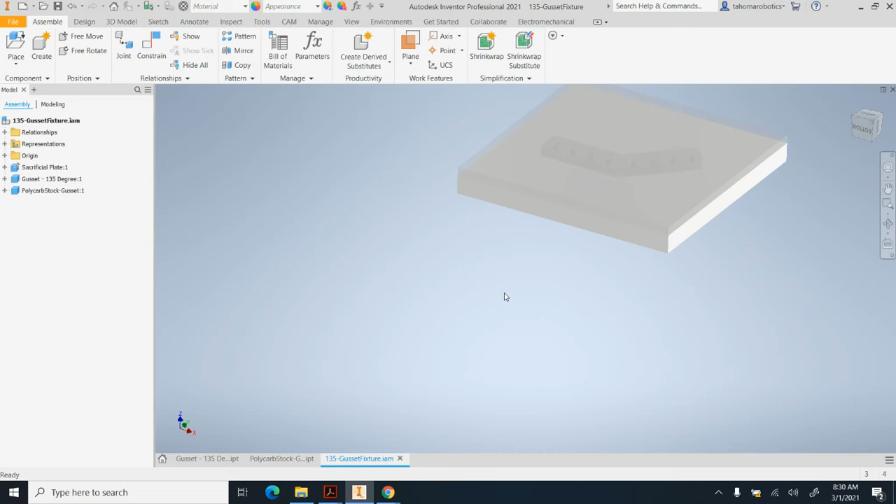Here I'm going through the CAM process for the 135-degree gusset that I've already gone over in class. What I've made here is a little assembly kind of showing you the setup that we would have when manufacturing this part. Again, there are many different ways to machine plate, but some of the hard things that you deal with is holding the flat plate material down while you're machining the part out.

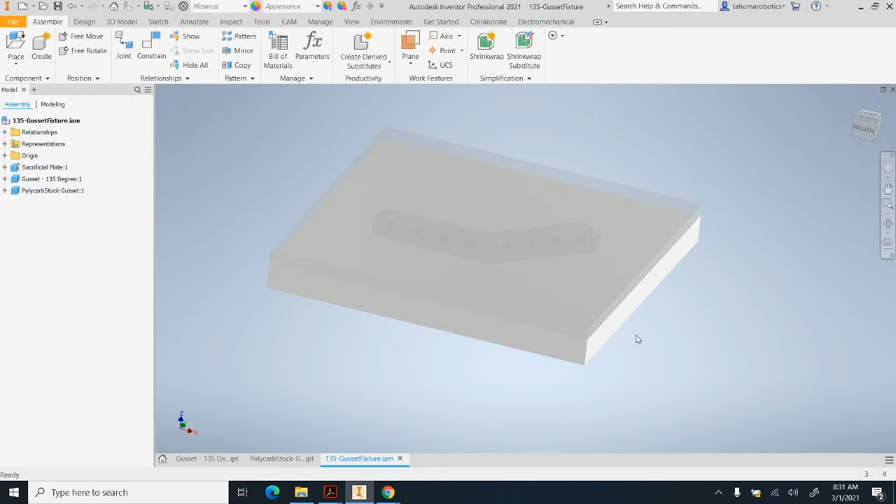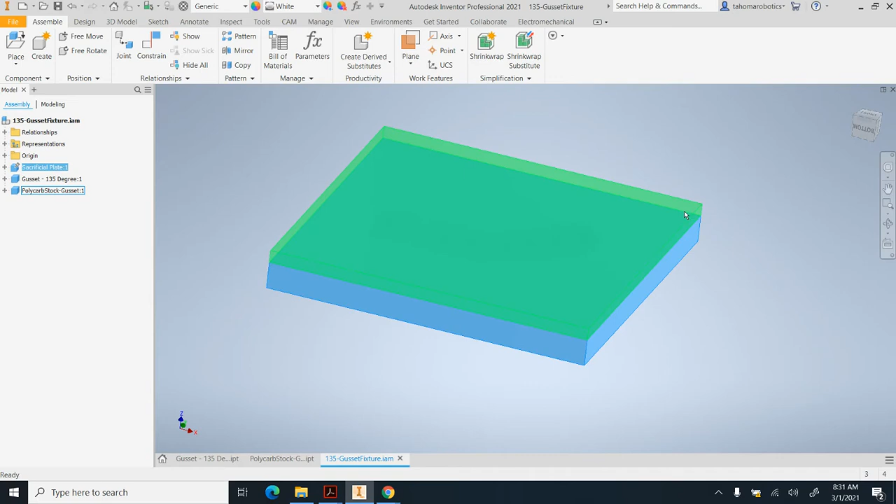One way, and probably the simplest to understand, is to have this sacrificial plate. And in this case, and I showed it to you in class, this is just a half-inch thick piece of polyethylene plastic. It could be different materials. I typically like it to be softer or as soft as the material that I'm machining. Then you can see the stock material, which is the polycarbonate that we're machining the gusset from. And then you can see the actual model of the part.

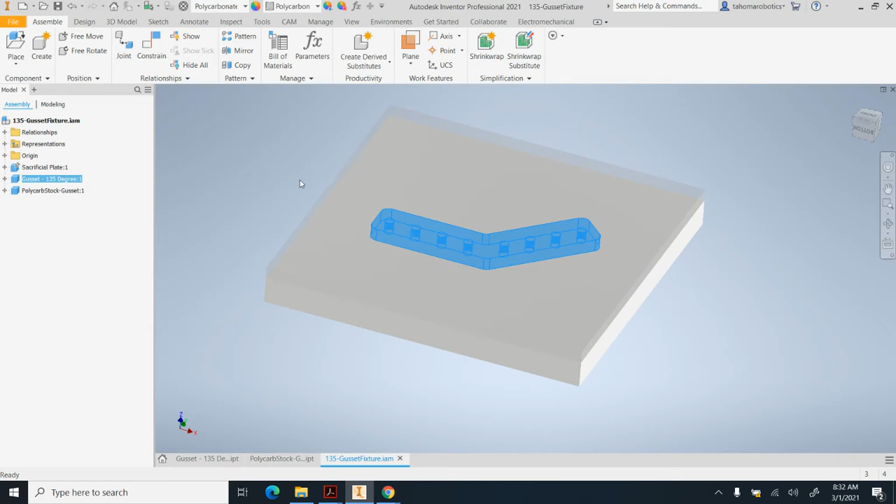Now, what we would typically do in class is clamp the polycarbonate to the table on top of the sacrificial plate. And so we would have some toe clamps here that we would hold that part down and then machine the gusset from it. Again, there are numerous ways to hold things down. This is kind of the most straightforward way to do it. I wouldn't say it's necessarily the best, but I think it's the easiest way to do it, and it's the easiest way to understand it.

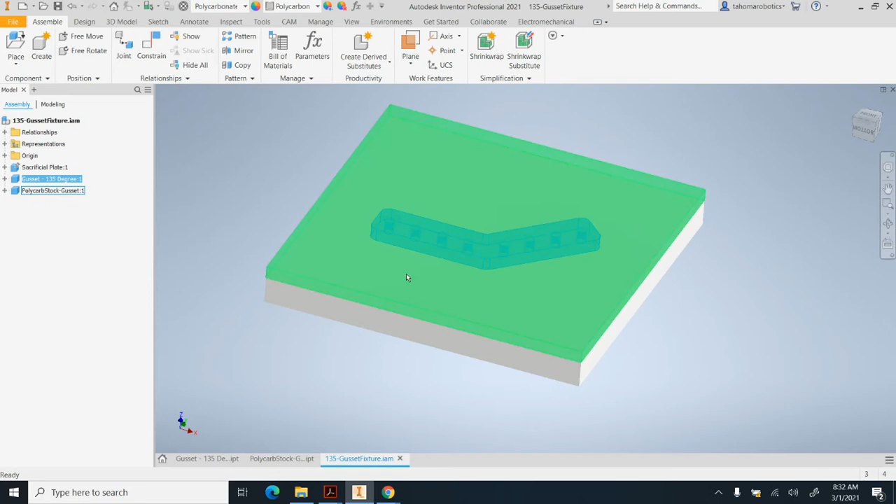So all you need to really do, though, is to understand that it is being held down. And when we actually manufacture it in class, it'll make a little bit more sense as you see the setup. But for the CAM, you don't have to have an entire assembly. You can do the CAM in an assembly like I have here, but I think it's easiest just to have the part like we have it here. And so here's the part, and it's modeled in polycarbonate.

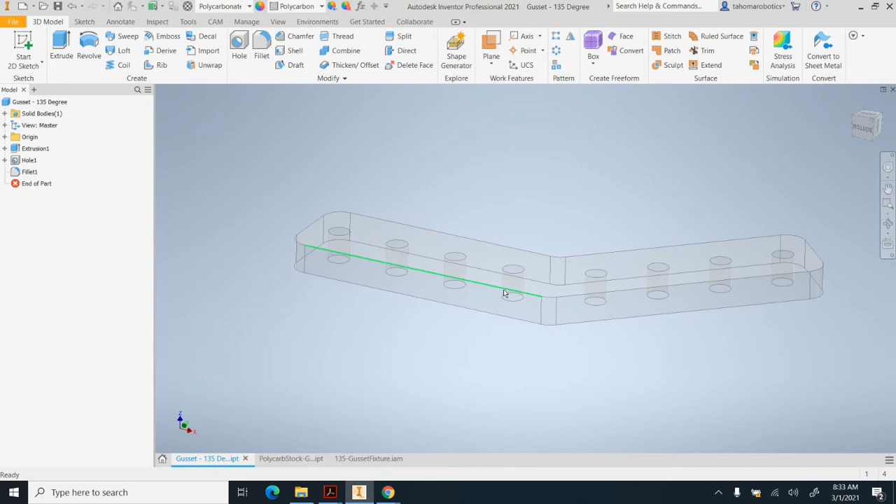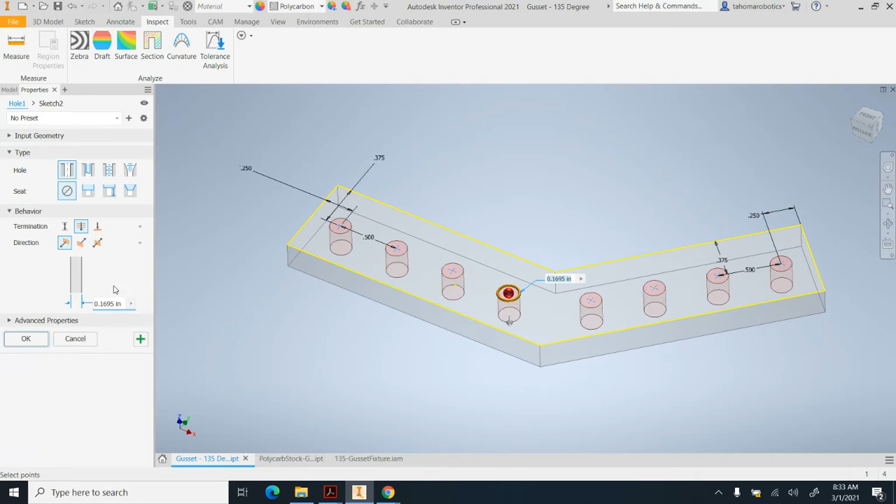And you can see that we have these holes, and then we need to cut it out. And so to make the holes, we can drill them, but I'm going to show a couple of different ways to make the holes in this video. The first thing I want to do is inspect and measure the diameter of the hole. That hole is 0.170. If I actually go to the model, you can see the hole here. And if I double click on it, it's actually 0.1695, but it's rounded up to 0.17 when I showed the measurement. That 0.1695 is actually the close fit clearance hole for a number 8 screw.

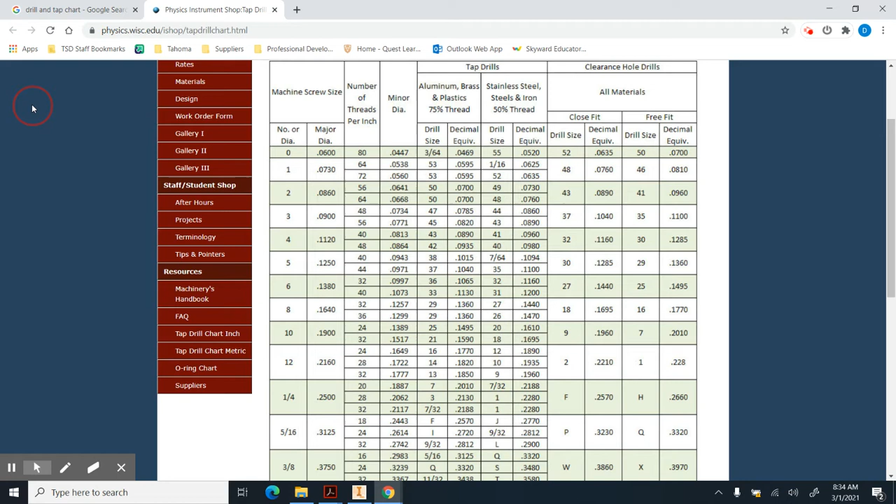So this little gusset can be used to align with the square holes in the VEX structure, so that you can attach things at a 135-degree angle with respect to one another. And so that's basically how this part was designed. These holes are a ½ inch apart, just like the holes in the VEX structure. So the first thing we're going to do is go to CAM, and we're going to go to Setup. And the first thing that it does is it gives us the gnomon. It creates some stock material. We need to get things set up properly.

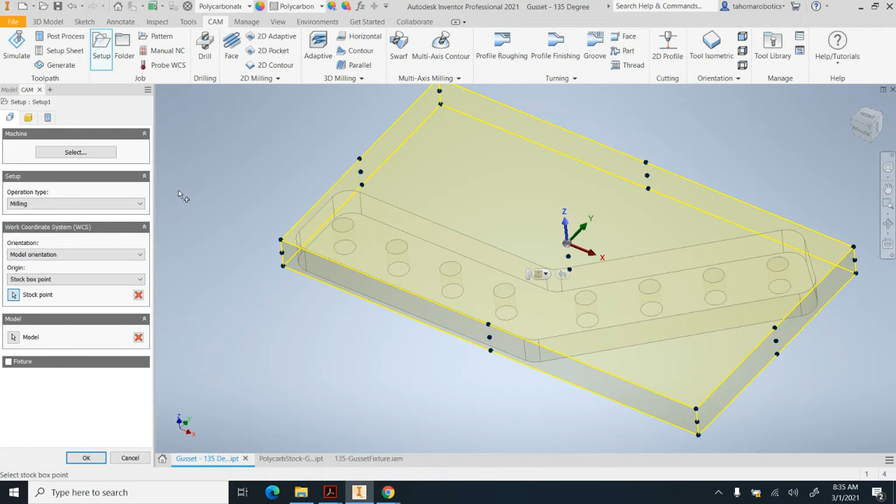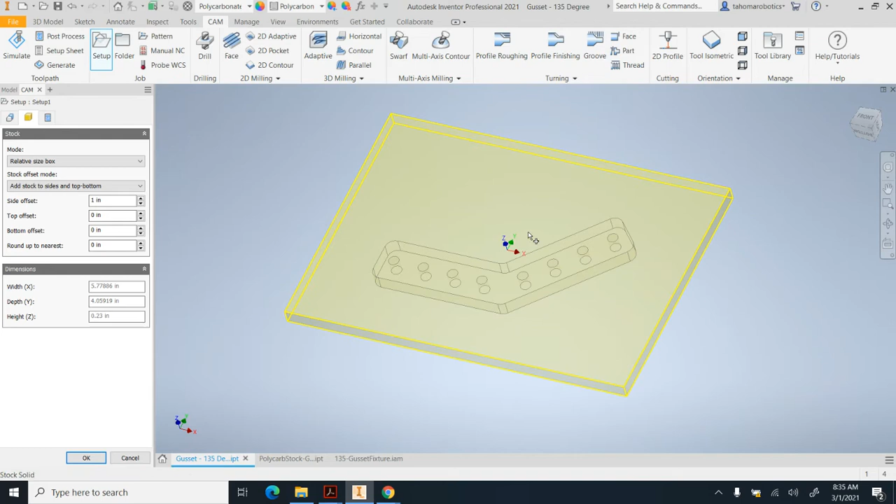I'm actually going to go to the stock first, and I'm going to change the relative size box. I'll keep it there, but let's add material to the side. But we don't want material to the top and the bottom. We want the stock material to be the same thickness as the actual model. So we have that there. So I'm just going to leave it like that. It really doesn't matter exactly how big the stock you have, as long as it's bigger than the part.

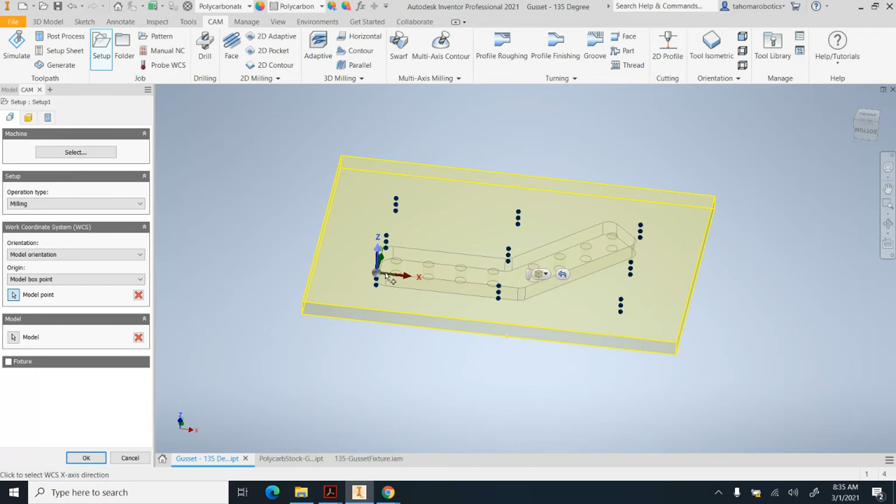So I'm going to go here to the stock box point and hit the drop down, and I'm just going to go to model box point. And again, it really doesn't matter where the origin is at. You just need to ensure that you have the Z-axis coming up from the top of the stock.

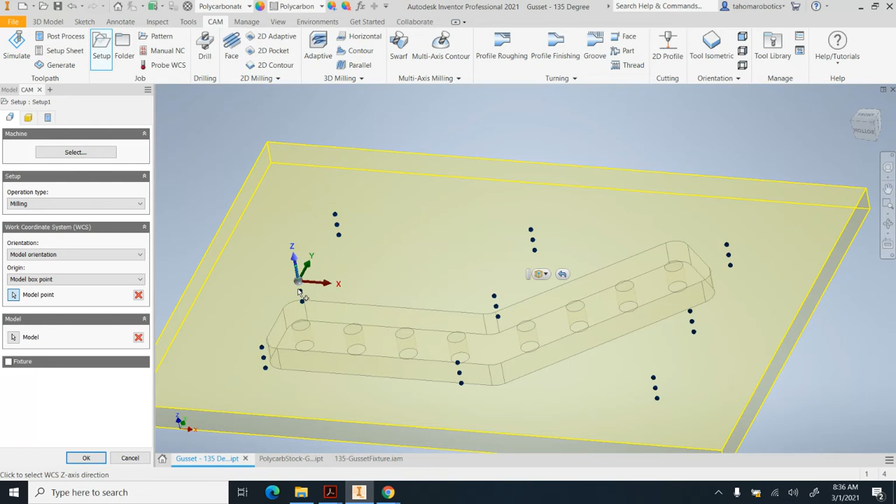Okay, and so our origin will be on top of the stock material, which is the same as on top of the model. And we have the x-axis, in this case, going to the right, and the y-axis going this way. And that's a great point. You could choose this point as well, but again, don't choose on the bottom. Let's choose on the top here and make sure that the z-axis is indeed pointing upward.

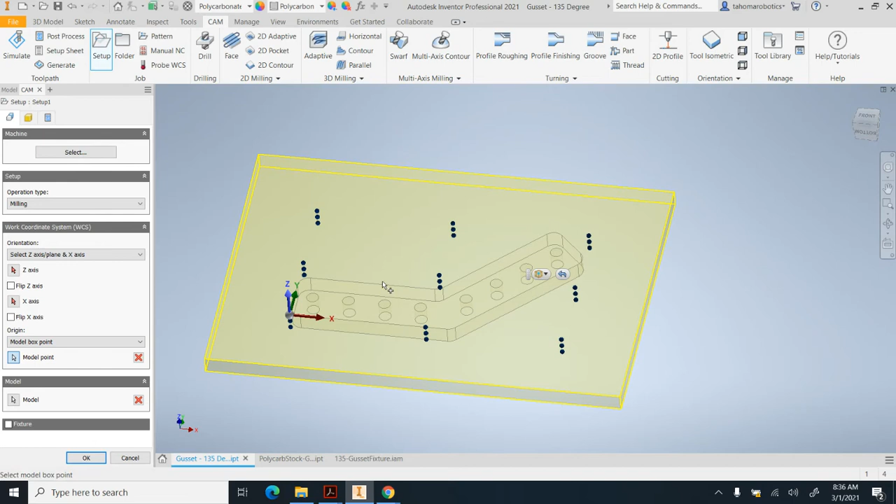All right, so now that we have the origin, once we're at the machine, I haven't shown you how to set the origin or the work coordinate system at the machine, but what we would do is we would set it and define that to be the location of the work coordinate system. And then we would know that the part would be machined. In this case, that would be the lower left corner and the part would be machined above it.

And so when we go into the shop and actually make this part, I think it'll make sense more when we actually go and manufacture it. But now that we have the work coordinate system set up, we can hit OK. And now we just need to decide how we're going to machine it. First, let's go to drill.

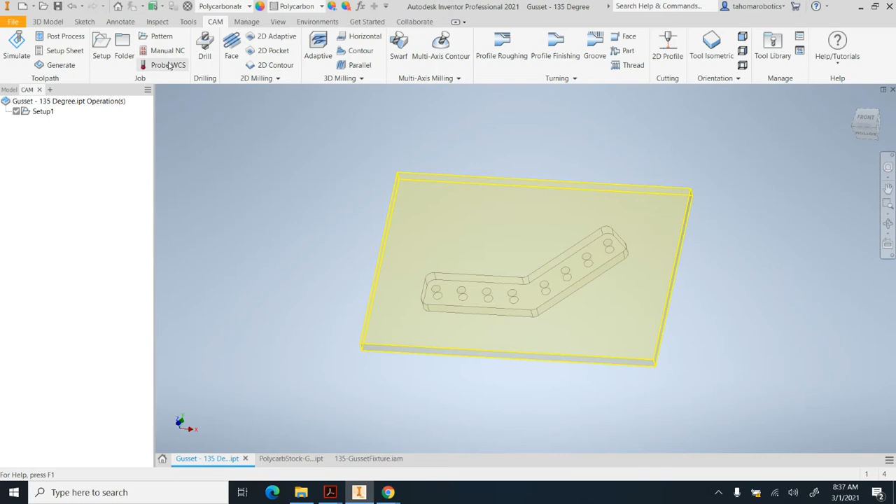Let's drill the holes. And the tool that we're going to use, let's use the smaller Haas milling machine. So I'm going to go to the Haas TM1. And I have a tool that is a drill bit for that size, 0.1695. It's a very popular hole size, and so I have a tool devoted to it. And so I'm just going to select this tool here and hit select.

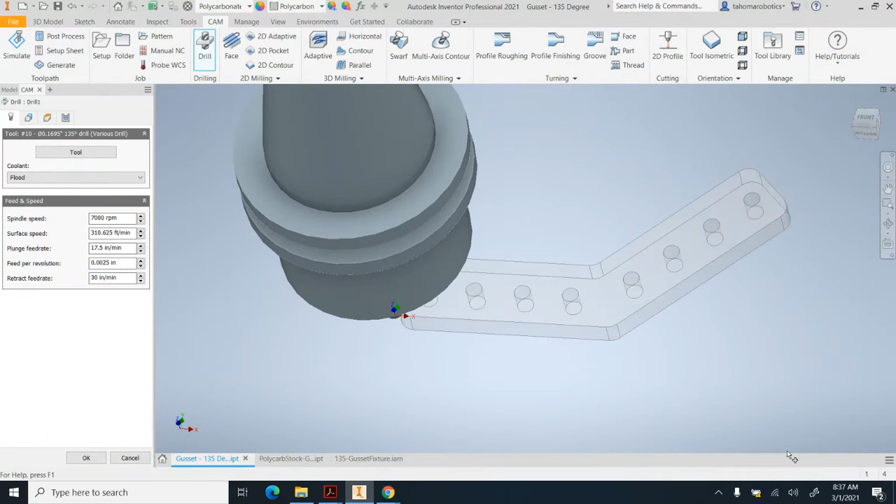And then I'm going to go to the next tab, which is geometry, and start clicking on the holes. And now instead of clicking on all of them, I can just go select all holes of the same diameter. Now that I've selected the holes, we need the depth. You can see that the drill bit right now is going to the hole bottom. We can keep this at hole bottom, but I do want to go a little bit deeper.

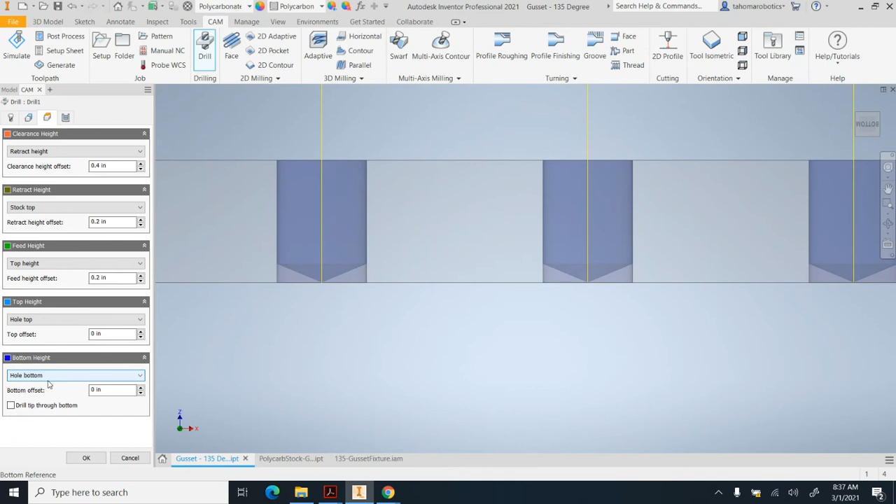And so we're going to drill through the bottom and let's add 20 thousandths just to make sure that we have the hole cleared out with the drill bit. Realize that this drill bit is diving into the sacrificial plate below. So now we have the holes drilled.

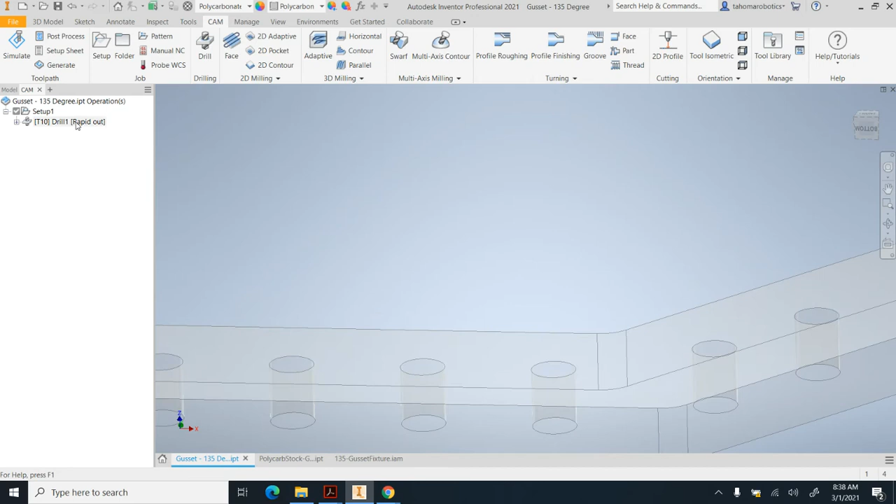There is another way to do the holes. Let's say that you did not want to dig into the sacrificial plate. You didn't want to drill into it. You could raise the depth of the drill bit. You could go here and unselect drill through the bottom and then maybe lift it up a little bit, a couple thousandths, maybe we'll go 4 thousandths. But then we have a lot of material left over, and that's going to be hard to clean out later.

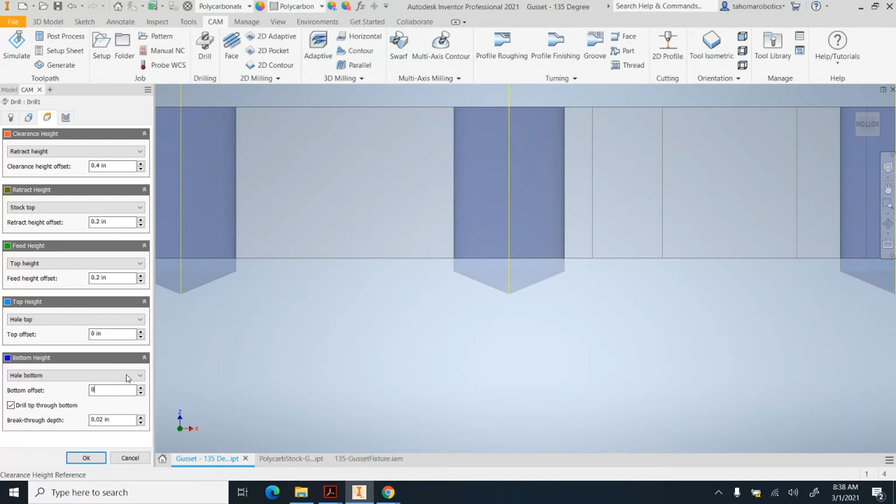And so typically, if I want to get closer to the bottom without touching the sacrificial plate, I'll use a different operation. And one way to do that is to use the bore operation. So I'm just going to show that here under 2D milling. We can go to bore. And instead of a drill bit, we're going to use an end mill.

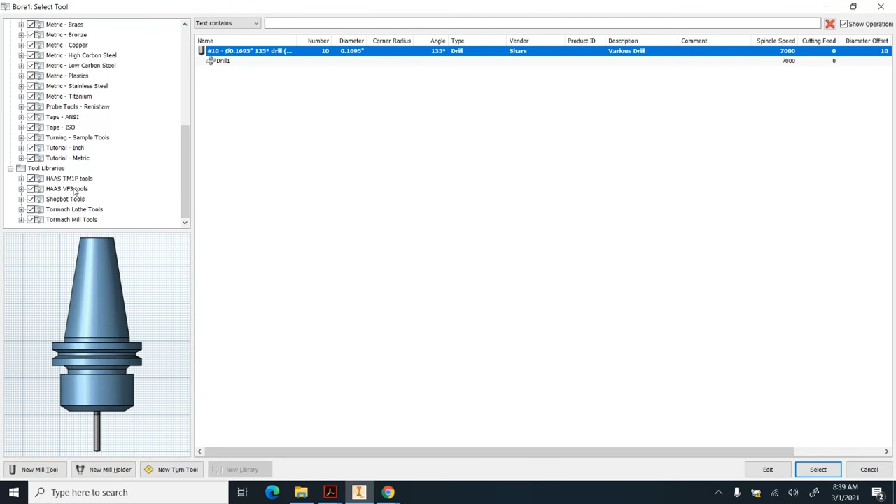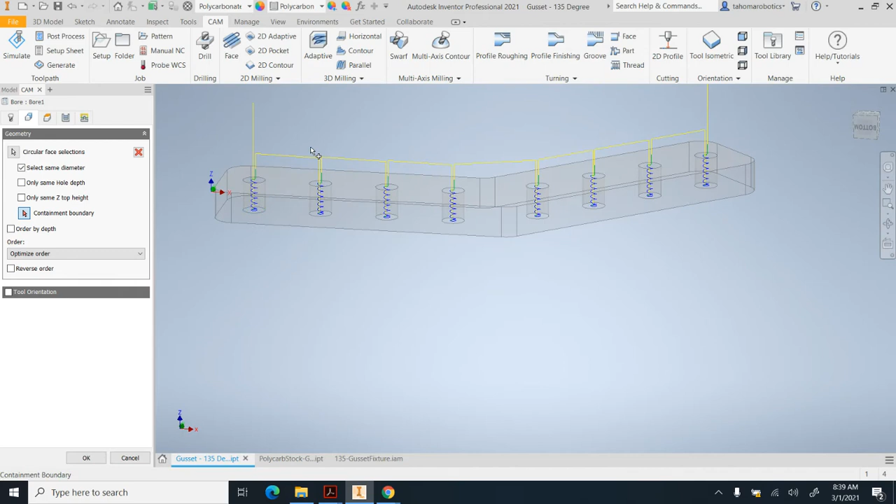So under the TM1P tools, we need an end mill, a flat end mill that's smaller than 0.1695. And in this tool library, I only have one of those, and that is tool number 2, which is the 1/8 inch flat end mill. So selecting that, 0.125 is less than 0.1695. I can go select. And the geometry are the holes. I'm going to select those of the same diameter. You can see that we're not drilling in, it's moving in a helical path, cutting the material away.

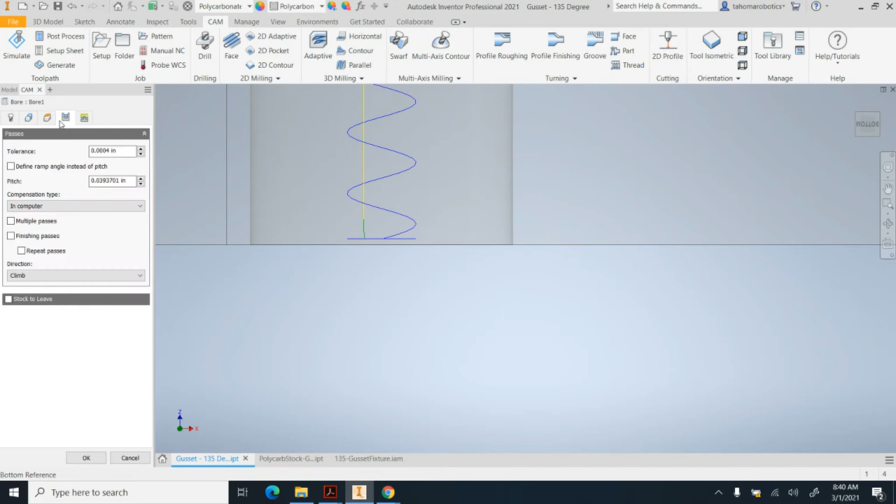And under depth, instead of hitting the bottom, let's stay up above the bottom by just a few thousandths, maybe 4 thousandths of an inch. And so we're going down and we're staying up above the sacrificial plate. Couple other settings you can play around with. One thing about that small tool that I worry about with the bore and this helix is it's kind of diving in maybe a little bit too quickly.

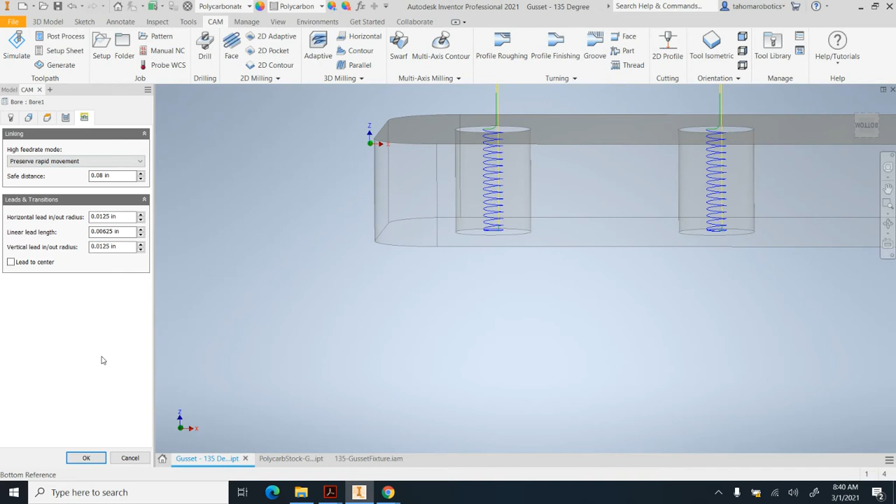And so one thing I like to do is define the ramp angle instead of the pitch, and then you can play around with that. Maybe a 5-degree ramp angle is a good ramp to kind of slowly work its way in and do this helical maneuver to dig out that material. For now, we don't need to worry about anything else on the leads. Everything looks good. And so I can just hit OK. And so instead of drilling, I could use this operation here.

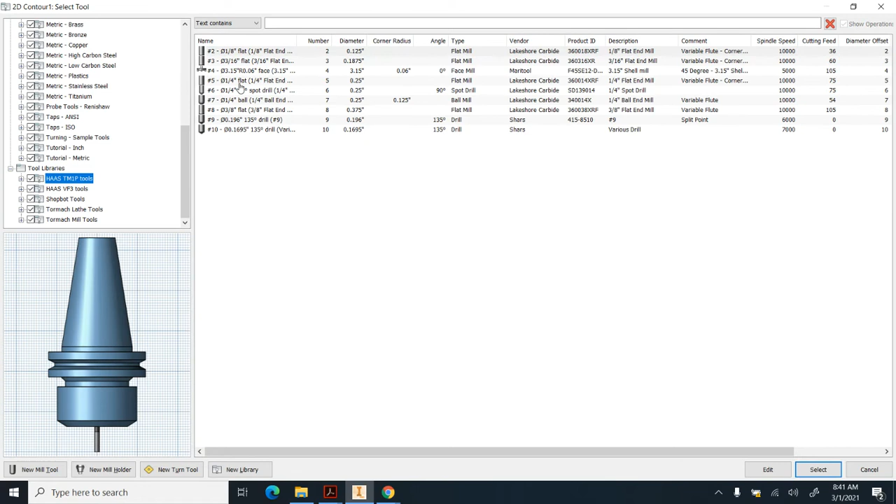All right, the next thing that we need to do is now cut around and do a contour to cut the piece out. And so we're going to go to 2D contour, and the tool that we're going to use is the 1/4" flat end mill. That's kind of the standard tool that we use a lot for contouring.

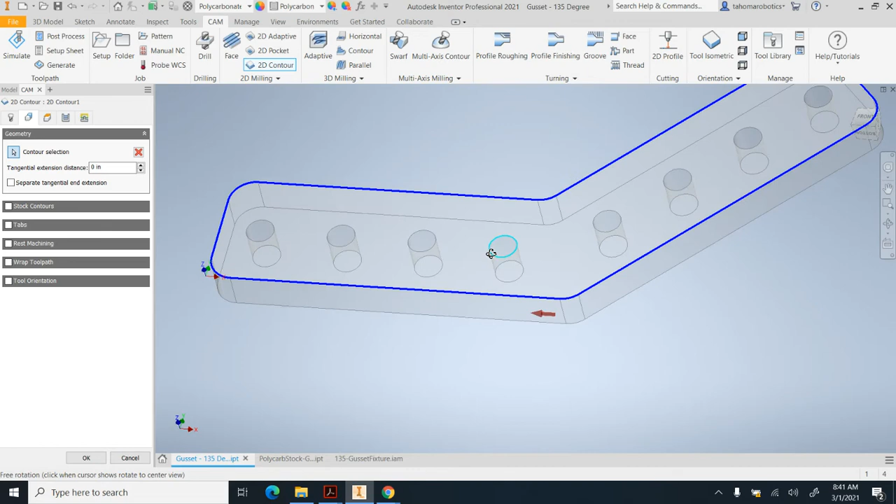And so I'm going to select that. And then the geometry is just the outside. And I selected the top edge. You could select the bottom. Either one will work, but you just need to be aware of how deep it's going when it actually goes through and cuts. And then the depth.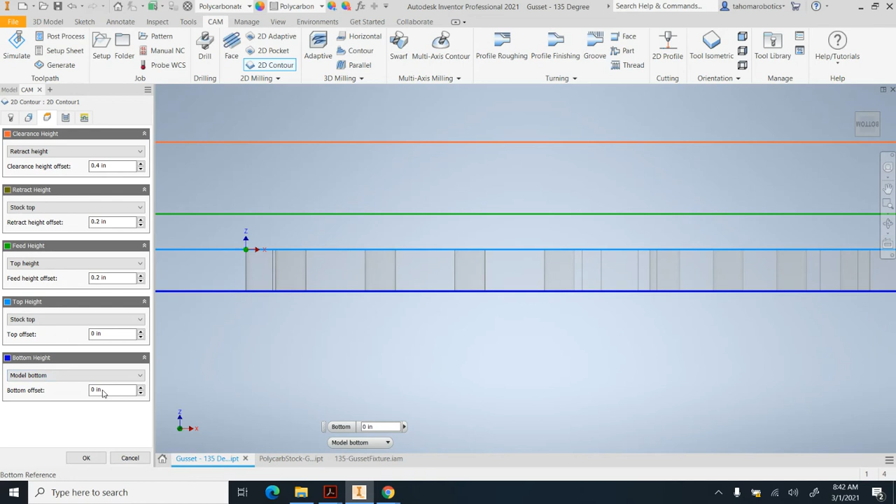For right now, I'm just going to leave it just as the bottom of the model. So right now, the depth is the selected contours, which is here. That's not going to cut anything. So what I'm going to do on the drop down is go to model bottom, and then I can make sure that I'm cutting to the bottom of the model. I could do stock bottom, again, because the stock is the same thickness as the model. There's some options there. If we wanted to stay off the sacrificial plate, we could be up just a tiny bit, a few thousandths. But for right now, I'm just going to leave it at 0 and hit OK.

You can see what's going to happen. We're basically coming in, diving into the material, cutting around, and then kind of leaving with this little exit. Couple of issues here. One, the part's going to fall out due to me cutting completely around. So when I get close, the part might flop around and fall out. So it'd be nice to prevent that from happening.

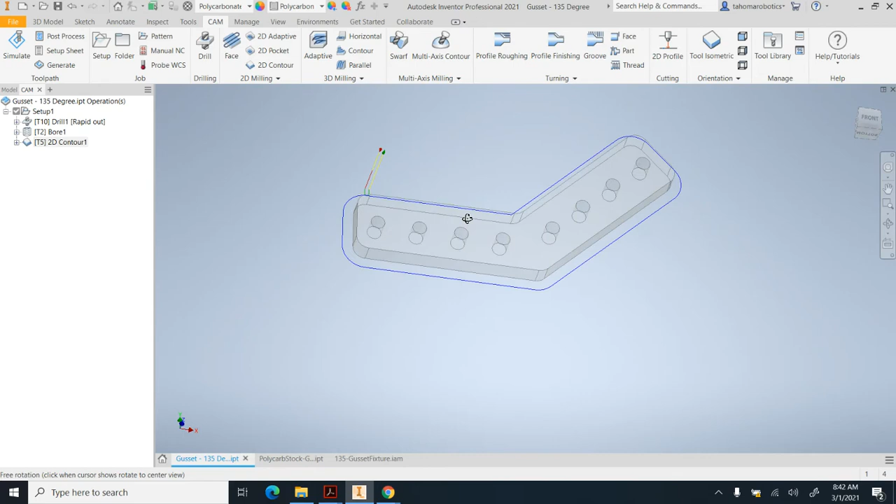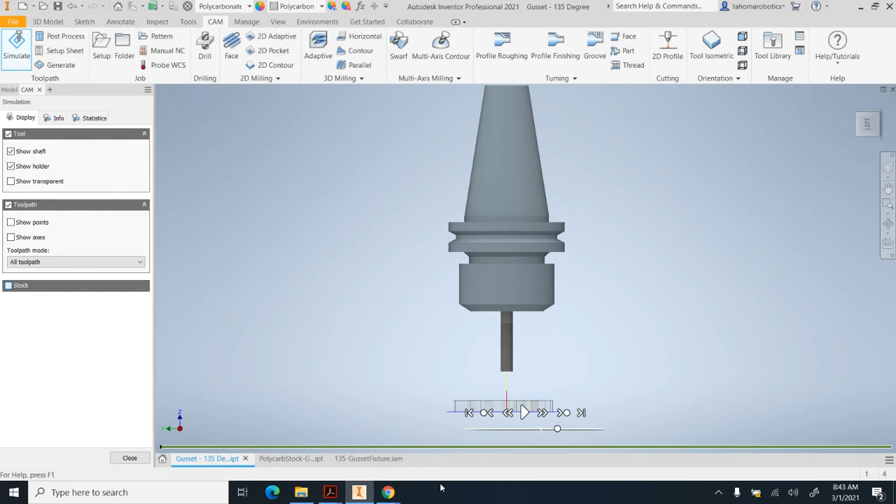Two, we're cutting kind of deep for the 1/4" end mill. I typically don't like to cut 1/4" deep with a 1/4" end mill. I try to do about half of that. And then also, I don't like how it's diving into the material as well. If we did a simulate, if I show the stock, you can see the tool is just diving vertically into the material when it first enters. And that's really not a great way to treat an end mill. You shouldn't be diving vertically into the material, even if it is plastic.

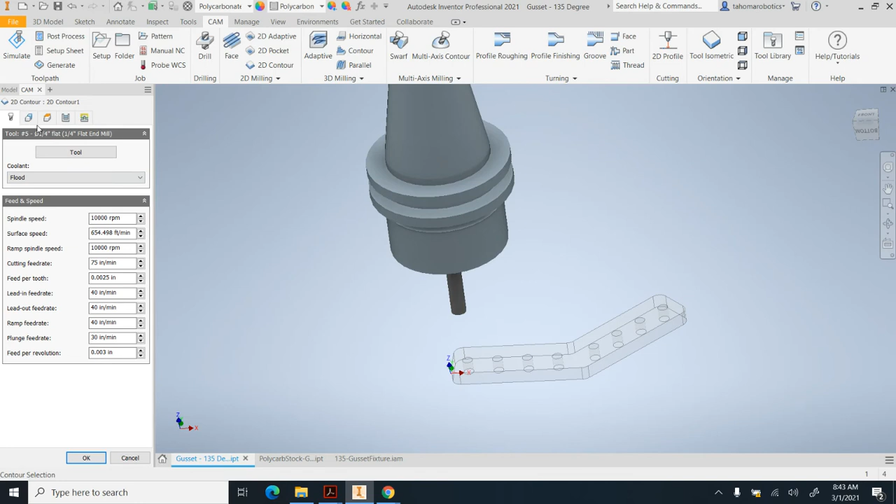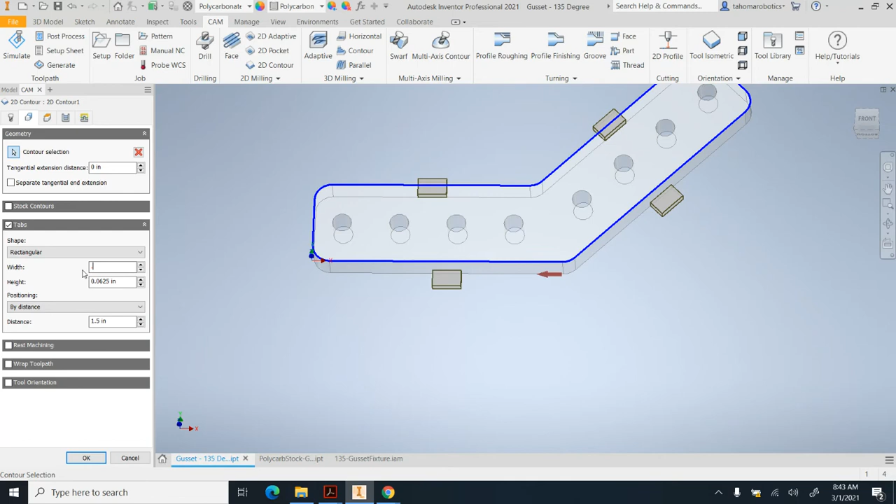So what we're going to do is double click on this contour here. In the second tab, we're going to add these little tabs to kind of hold the part in place. And you can play around with the numbers. You can see that right now there's only 2 tabs. I have them positioned by distance. If we make the distance a little bit smaller, maybe 1.5 inches, you can see I have 4 tabs. They're holding it. Maybe I want them to be a little bit wider. 0.4 might be nice. 0.375 is 3/8, somewhere around there.

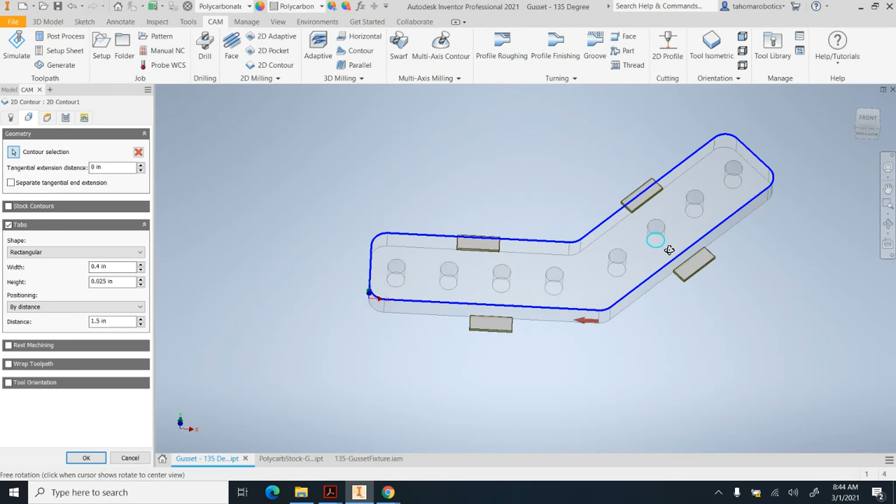And then they probably don't need to be quite that thick. We can maybe play around, maybe 25 thousandths. It's kind of difficult to know exactly how thick of a tab you should make, but realize the tabs that you have, you're going to need to cut off at the end, but it's going to keep the part from flying around when you do cut it out. So that's one thing that we're going to do. And if we hit OK, we can see that we now have these little tabs. If I do a simulate and play this really quickly, you can see that it leaves these tabs here. So that's the first thing we're going to add.

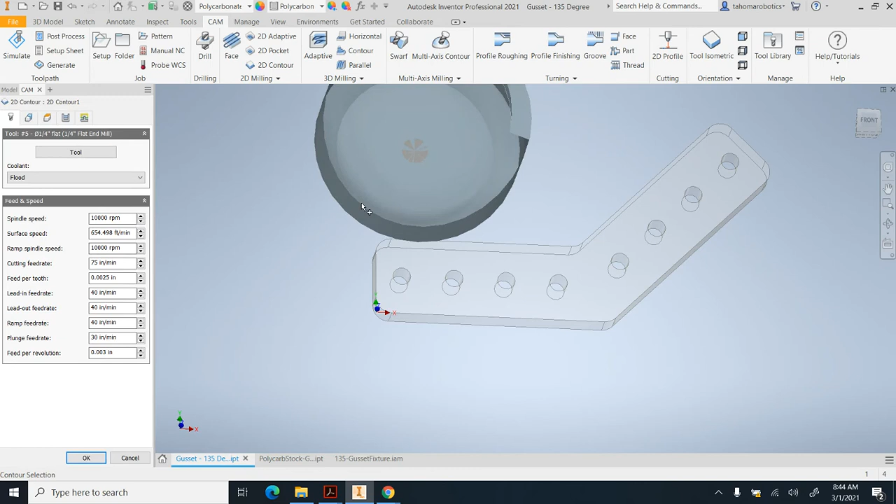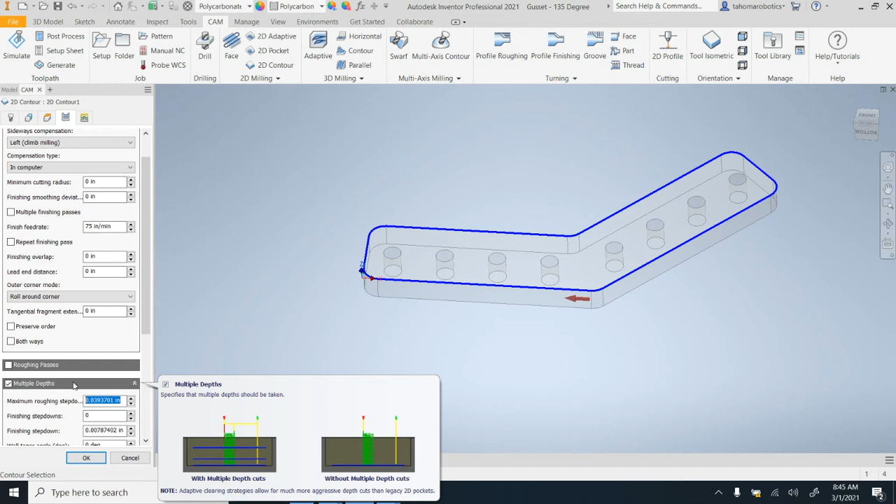Second thing is I said something about the depth. I didn't like cutting so deep in one pass. And so what I do is multiple depths. And then typically on the maximum roughing step down, I try to set that to somewhere around the radius of the end mill. So if the end mill is 1/4 inch, that's the diameter. So the radius would be 1/8 of an inch, and that is 0.125. So if we choose right around 0.125, that will break this into 2 different steps as it cuts, and that's a lot easier on the end mill.

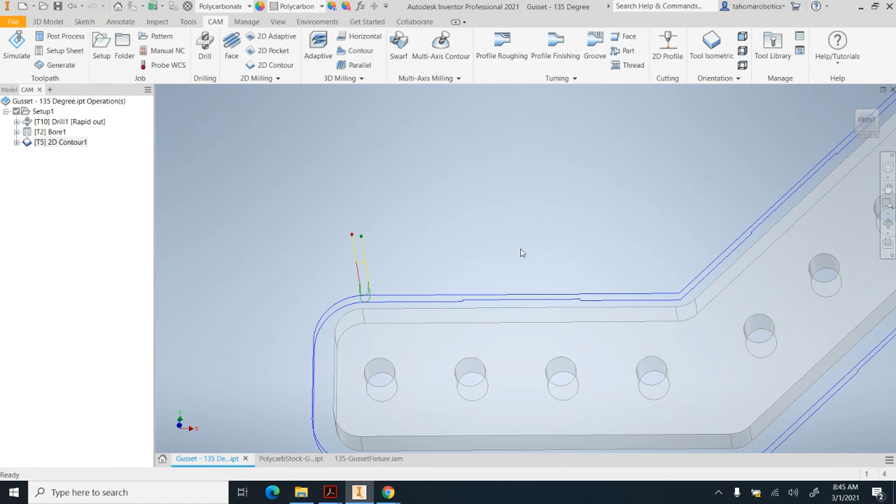Essentially we're doing a slot cut because we're cutting through the full width of the material as the end mill is moving through. And so whenever we do a slot cut, I like to cut it down to at least the radius of the end mill.

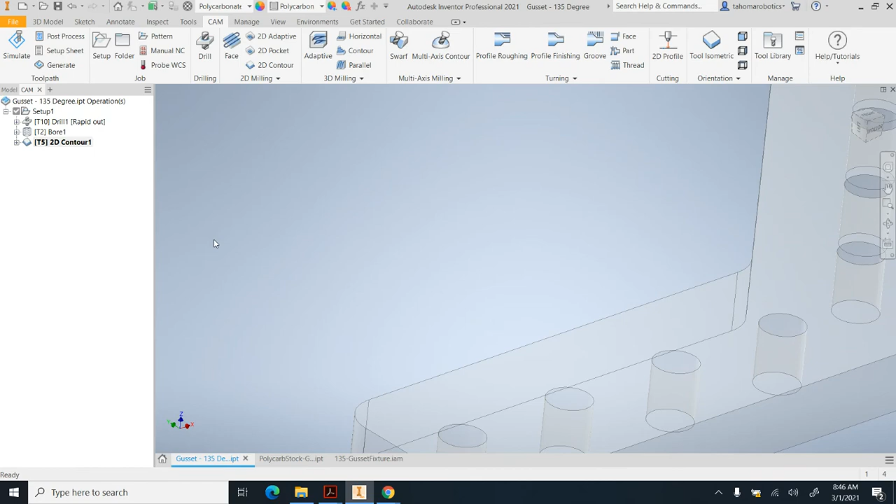Next thing, I don't like diving into the material. And so what we're going to do is double click here, go to the last tab, and we're going to ramp in. And I just keep the default settings typically. And I wanted to show you what this ramp is. Basically, we angle slowly into the material at 2 degrees. And again, you can change that angle, but you can see now in red here, the tool is leading in, and it's not entering the material until it gets over here. And then it slowly enters the material, cuts around, and then for the second depth, it ramps again. And then it slowly goes down and then gets to the bottom.

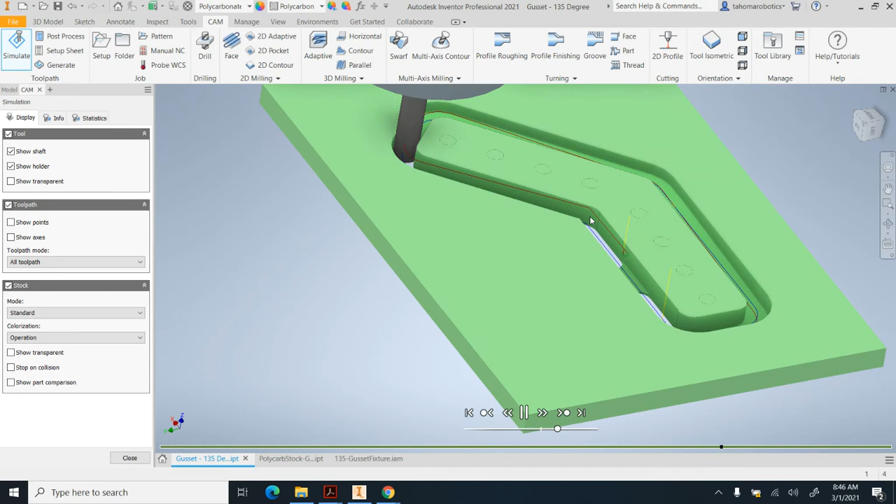So that looks a lot better. Still a couple things I don't like. One is this exit. So we've ramped in nicely, but when we've exited, we've kind of pushed through all of this material, which is 1/4 inch thick, before leaving. And for plastic, it's really not going to hurt the end mill. It should be able to handle that. But if it were like hard metal, there's a good chance you could break it, especially if it were thicker.

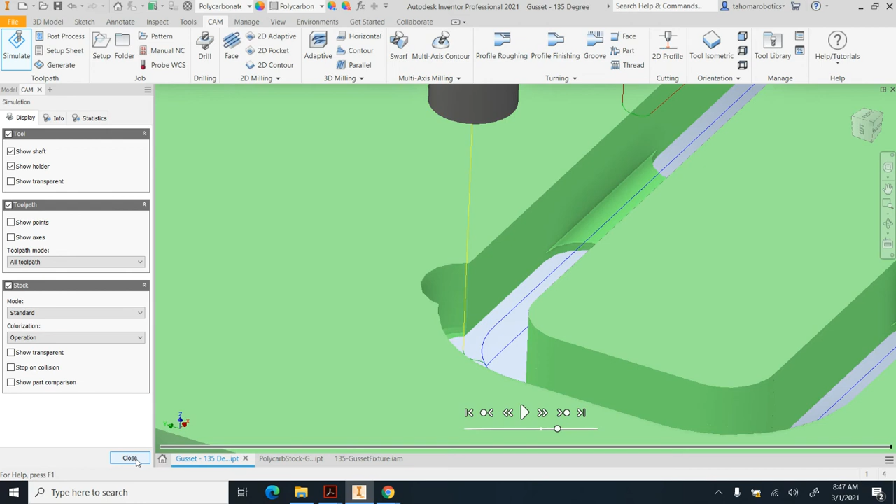And so let's get rid of that curved lead in and curved lead out. We can do that by going here. Actually, I think it's the last tab. And where it says leads and transitions, there's a sweep angle set at 90 degrees with respect to the part. I'm going to change that to 0. I'm going to keep the other settings the same.

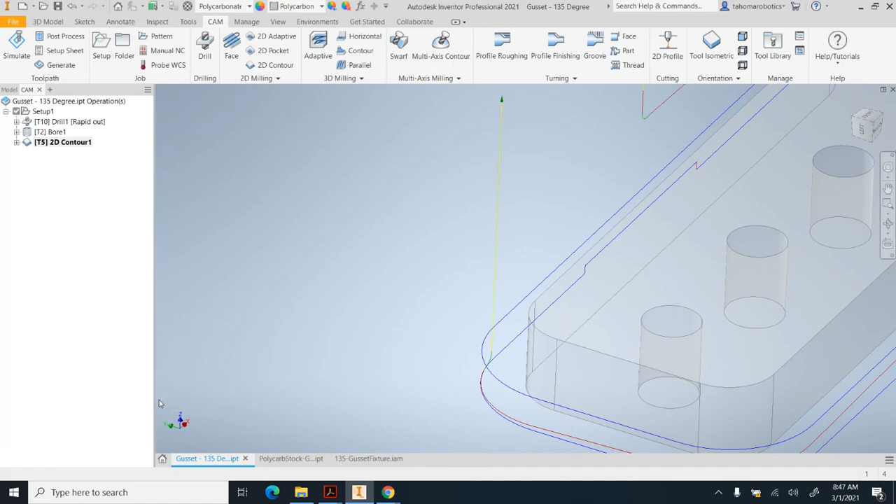You can see now when it leads in, it has a 0 degree lead in, meaning that it's kind of leading in parallel to the part and exiting parallel to the part. And so that's going to be a lot safer on the end mill.

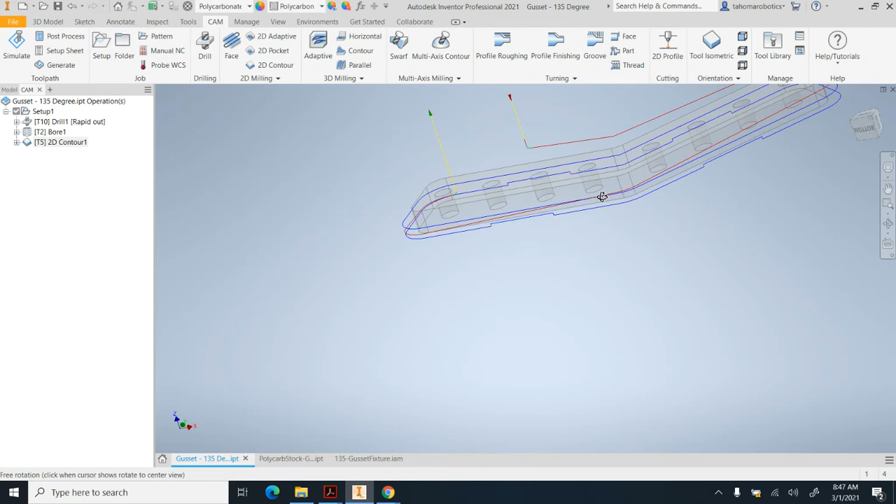The final thing that I want to change is the shape of the tabs. Might not be a big deal, but you can see that the shape of the tab is rectangular. The tool's going straight up and then straight down. And so when it goes straight down, it's diving vertically into the material, which again, I'm not a big fan of with the end mill. It's not designed to do that very well.

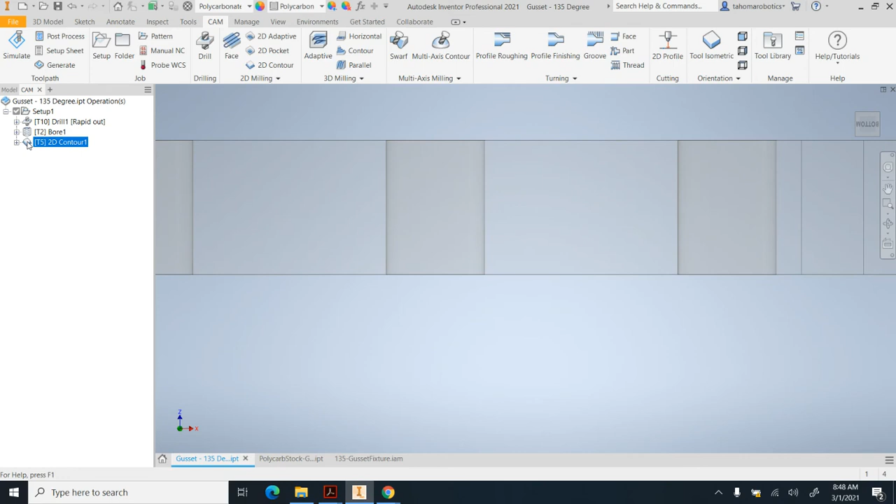And so what I'm going to do is double click there, go back to the tabs, and I'm going to change the shape of the tab to like a triangular shape. Yes, that's less material for the tab, but we can change the thickness or whatever if needed. But now the tool is never vertically diving into material.

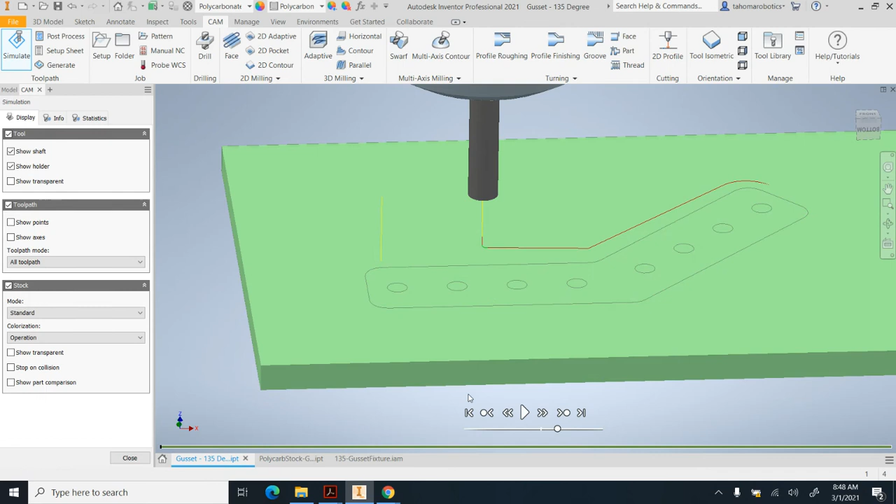So if we simulate here, you can see that the tool comes in, it's doing its 2 degree lead in, cutting around, and it's doing the step downs. Now it's going again, diving this ramp, and now it's leaving the tabs. You can kind of see the tabs there. And the goal would be that the part would stay in place before we unclamp it, and then we could break the part out and file and clean up the edges here.

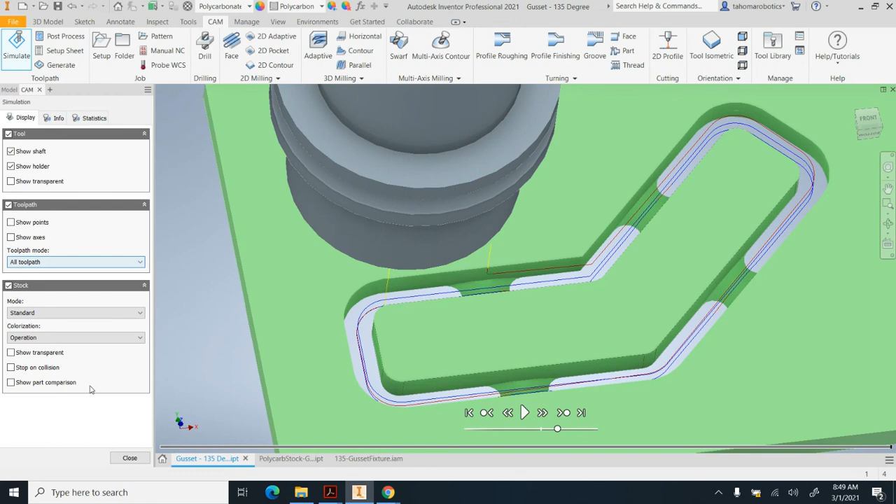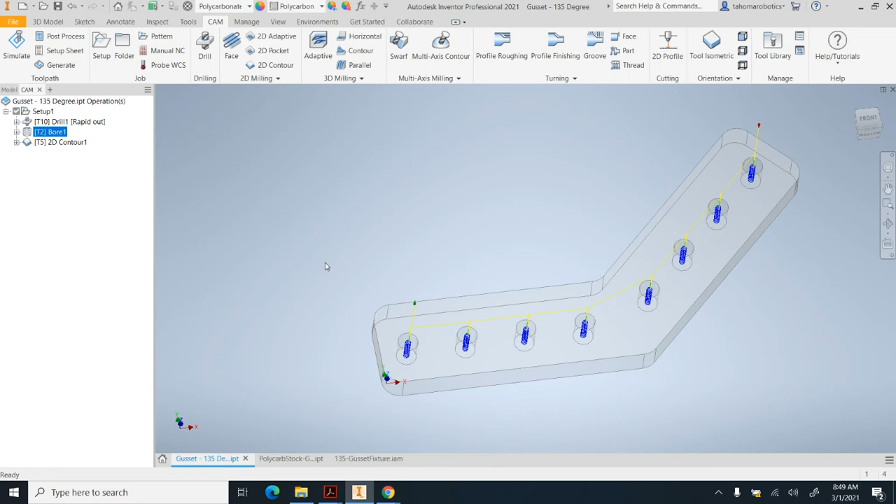Notice we don't need to do the drill and the bore. We can do just one or the other. Okay, so let's say we want to keep the bore and get rid of the drill, then you would just delete that. Notice the bore takes a lot longer because it's not straight down drilling the part. It's slowly doing that helical maneuver as it digs out the material. So it's a lot slower. And so you do need to be aware of that when machining it.

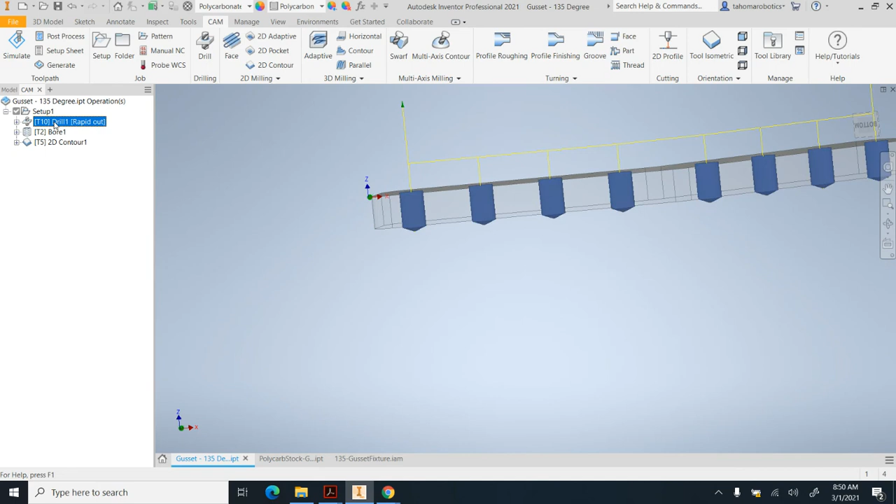If you don't really care about the sacrificial plate, sticking with the drill bit is definitely the way to go. But if you have a plate like a fixture plate that's made out of metal and you don't want to dig into it, then you should not be drilling. You should use a bore. Okay, so I'm just going to delete the drill here. You don't need them both.

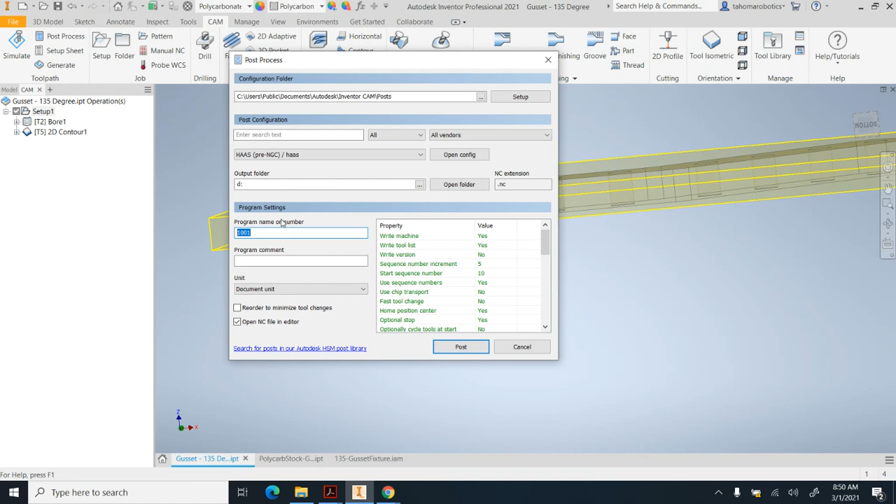And then finally, to create the G code, you just hit setup. Notice that we have these two selected. We can go post process, select the mill that we're going to use. I have it already pre-selected. It's the Haas pre-NGC from the drop down. And then you need to give it a number. I'm just going to leave it as a default number and then go post. For now, you can just save it to your download folder.

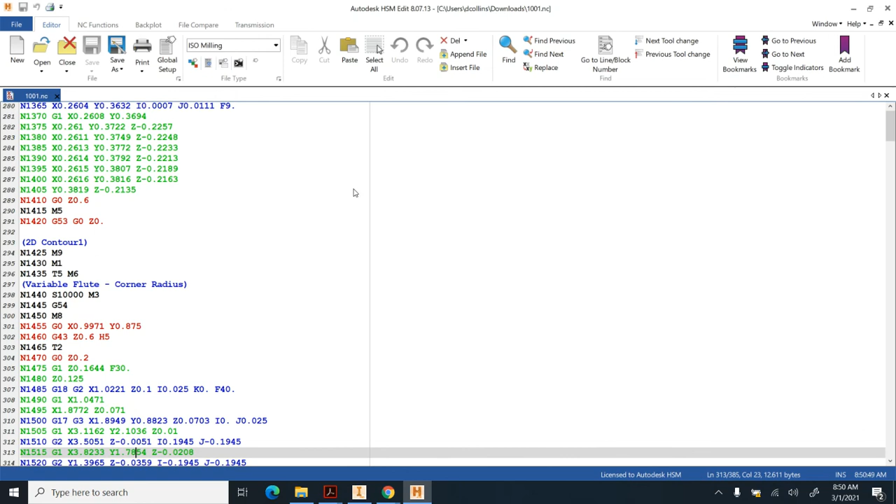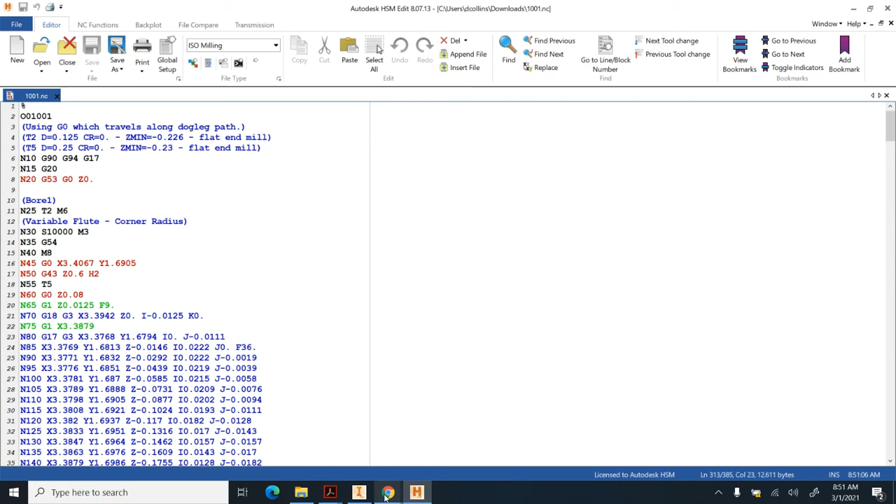What we would do if you were in the shop is you just save it to the USB drive, and then you take the USB drive to the machine and load the G code. So here is the G code for that part. What you need to do is just give me a small snip of the first page of it. So if you just snip this out and put it into the Google document, that's all you need to do to show that you've created the G code.